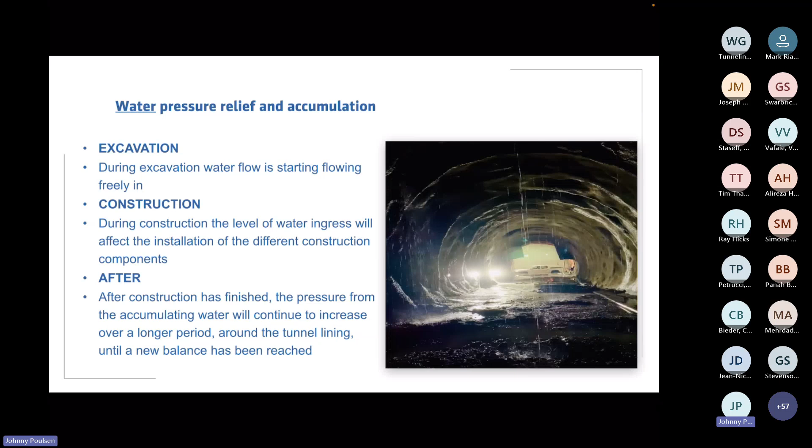The picture to the right is actually from a tunnel in Colombia, a road tunnel we made called Toyo. I think it's the longest road tunnel in America - this is 9 kilometers.

So we have all this water coming in - what is the actual problem with that? Why is it a problem? Well, first of all, the safety during construction is jeopardized, so it can have fatal consequences. And during construction, you sometimes have to do a lot of repair work, like injection work or other remedial work, to be able to go forward with the lining design.

The water pressure also can compromise the structural integrity, not just in the beginning but over time. If we have a lot more water pressure than we thought, then we have a higher risk because of the membrane situation and the thickness of the concrete and the fibers or whatever design we chose - it could fail at some point, referring to the dynamics I mentioned earlier, because you have changing dynamics in the surroundings. We're talking about many years and different types of risks.

And then, of course, the actual water coming in does different types of damage. That could be on the installations, and it can be on the road where it can form as ice, or be slippery on rail tracks, electricity - there's a lot of factors there which are dangerous. Again, with the ice, you can have cracking and spalling of the concrete, and ice falling onto the surface of the floor in a road or rail tunnel.

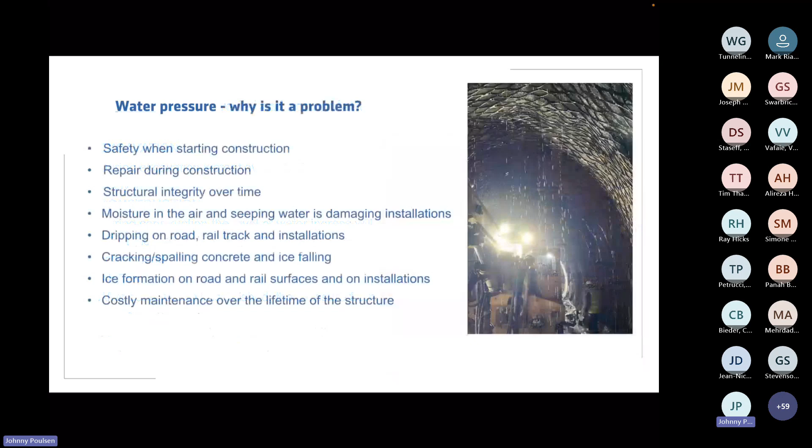So what do we do to handle this water? We have basically three principles we can use. Either we're trying to block the water from coming through and creating pressure behind, and this is done with different components. You have grouting, waterproofing, making waterproof concrete with wire mesh, fibers, or crystalline waterproofing—different types of designs for blocking the water.

Then we have the second principle, where we have it diverted. This is done with line drains and pipes, and different types of pipes through—like if you have a slope, you just let the water come out through pipes. So you try to divert the water so the pressure is no longer there. You can have initial draining on the rock, or later in the lining, in the outer layers, you can have another drain. You can also drill holes to lead the water to certain places. So different types of diverting the water.

And then the last part is where you have a situation where you just let it drip and accept not-so-watertight and dry structures. This can be done in different ways. You can have, for example, plates mounted onto the wall so you don't see it. For example, in a railway station, you may mount plates in front of the wall so you don't see the dripping, but just let it run and then pump the water out.

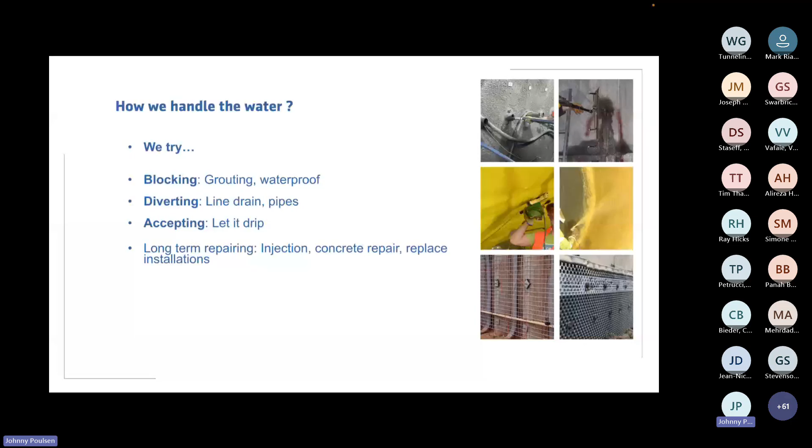So some of the components we use in the design—now we're trying to adapt the design so it's suitable for the individual structure. The first part is the concrete or shotcrete. We can do one or more things to the design of the shotcrete. You can make it fast setting—depending on whether you have a little bit of water seeping or a lot of water, how do you handle it? You can design for less cracking.

You can also choose a very heavy lining. This is typically done when you have a sheet membrane, with two cast concrete layers and a sheet membrane between them—the double shell lining. And you can have thicker shotcrete layers, combined with different additives into the concrete. This could be crystalline waterproofing, for example, is one of the things you can do.

And then, of course, if you have soil that's not so sturdy, going towards soft soils, you have steel girders you could put in, anchors, the anchoring of wire mesh. You can have the umbrella system put in—different structural stabilizers you can use. And then you have the drainage situation, where you can put different types of drainage in: line drains, dimple sheets, geotextiles, to take some of the pressure off the structure or lead water away from the lining.

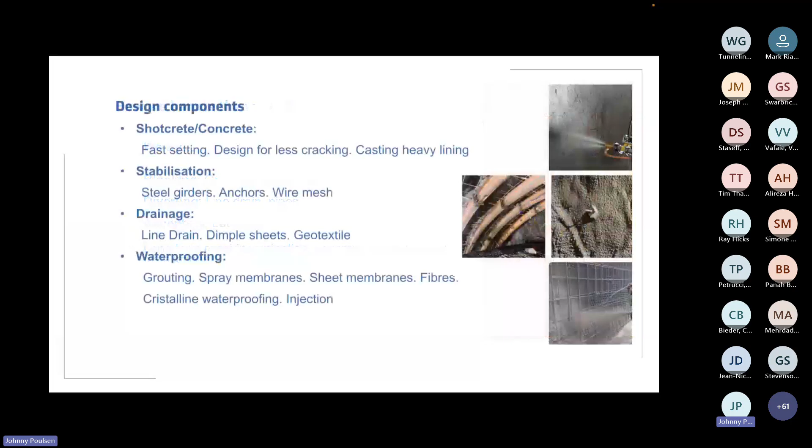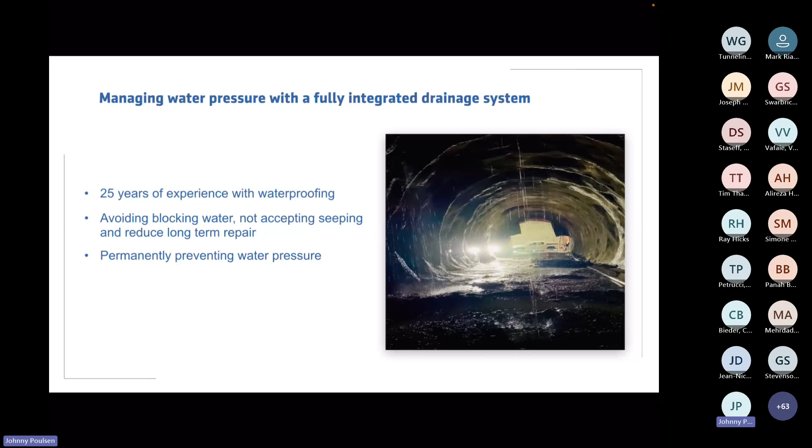With our experience, we found that the best way to improve these lining structures was to somehow find a way to prevent that pressure on the structure. We saw in the market different types of products that do this, but we found out how to design a systematic approach to this. If this is possible, then we can permanently prevent water pressure on the structure and alleviate a lot of these problems and costs.

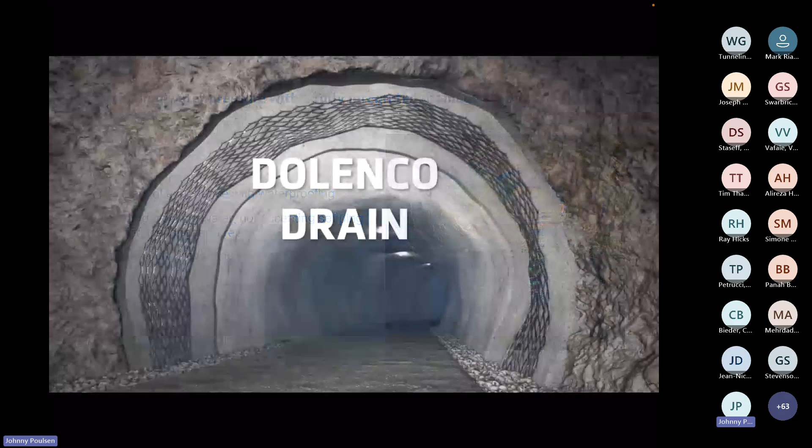That brings us to the Dolenco drain, shown schematically here. I'm going to show you a video in a minute—I'll just tell you what it's about. It shows the principle of Dolenco drain mesh drainage: you have the bedrock, the initial shotcrete layer, then the Dolenco drain mounted as the first product on the initial shotcrete, and then you cover that with one or two layers of shotcrete, in different combinations with the build-ups of these linings. Well, let's start the video.

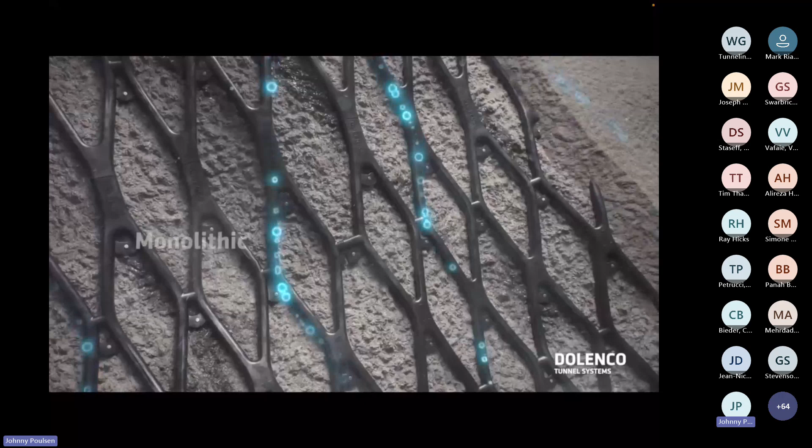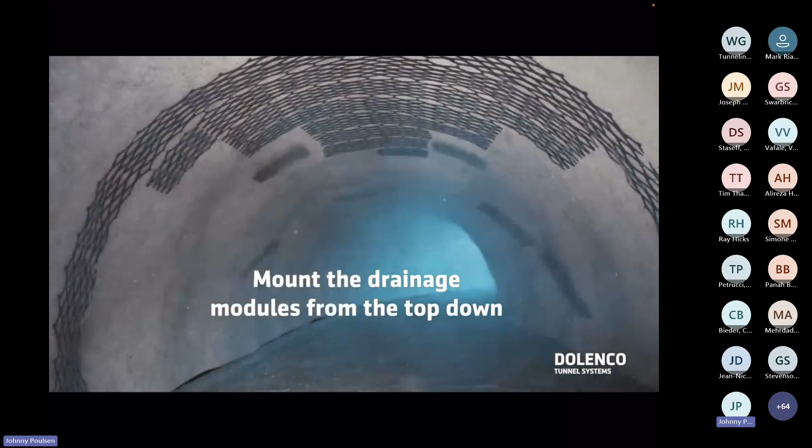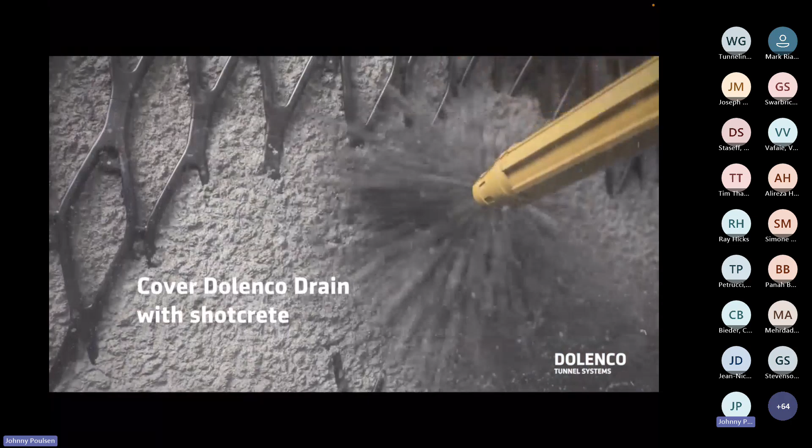As you can see, it's fully embedded into the concrete. The half-pipe modules are mounted from the top down, creating a horizontal and vertical network of channels that will receive the water. And then at the base, there's some kind of detail to alleviate the water away from there.

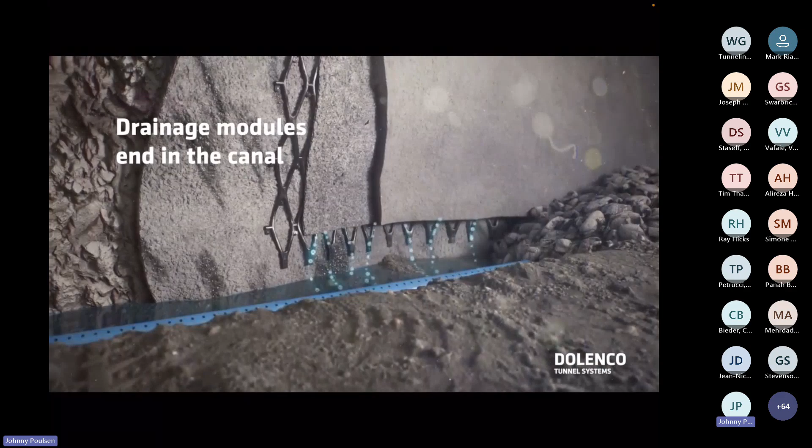So as you saw, it's module based, and it is a very slim part. It's only 14 millimeters, or half an inch, thick. I think you are in metrics in Canada, so I can say millimeters, I guess. For this reason, it's very good for repairing, for example, rail tunnels where there's very little space to work with.

So it's very lightweight, like 660 grams, so it's very easy to work with to mount. You basically have a nail gun with 30 millimeter nails, and you nail that to the surface.

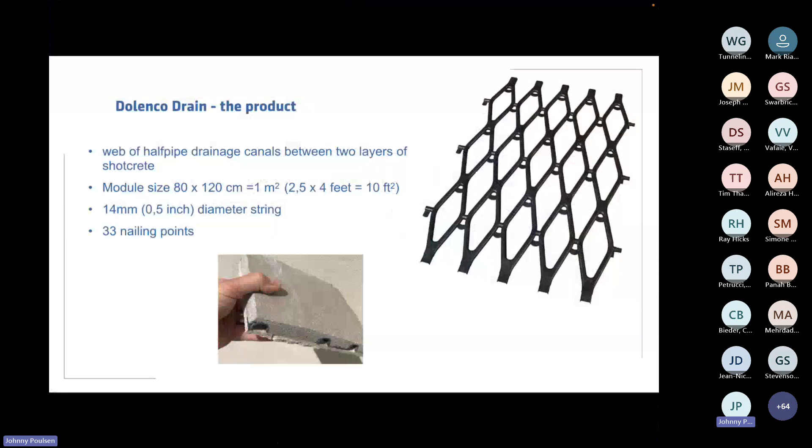When you've done that, you have these half pipes inside the structure everywhere to receive water from wherever it will come out. That's the whole basis of making it in a systematic way like this. So in a few years, if you have water shifting, which it often does, to a new place, putting pressure on, trying to come in, it will be received by the strings and led to the base. In this way, it's a very safe solution for the future.

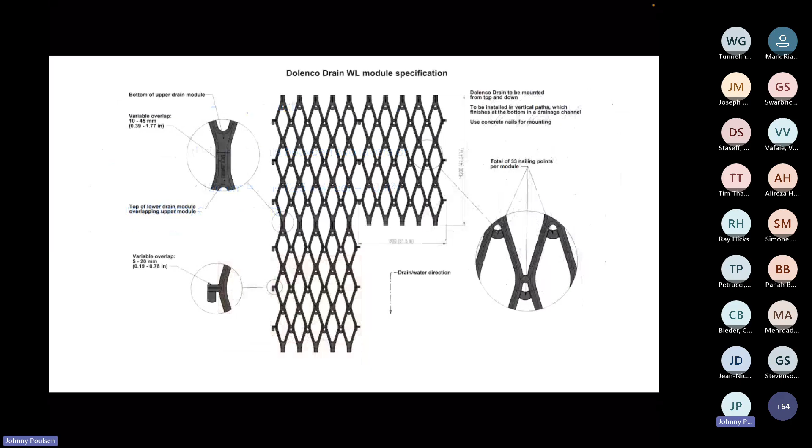Here's a more schematic picture of how the modules are mounted. Top left, you see the vertical connections overlapping and very flexible. Below that, you see the horizontal connection between the modules, so the water can also disperse sideways to the next module. This is important to make sure that you manage the water and there's no pressure buildup in there.

So it can take 8 cubic meters of water per linear meter of wall per hour. This is quite a significant amount of water. If you have that much water, you really can't get the shotcrete to stick to the surface. So this is more than adequate to manage the seeping that will come in, and since it's embedded into the concrete, it's a permanent solution.

As I mentioned before, it requires very little space since it's only 14 millimeters thick, so you can overlay with like 50 to 100 millimeters of shotcrete, and then you're good.

The material itself from the product has been chosen to be a product which can be recycled, so you can take it out and actually granulate it and make new products from it 100%. So this is our first step. We also have a second step, which we're just implementing now, and that's a biodegradable version which is compostable. So if you throw it in nature, it will just be eaten by the plants.

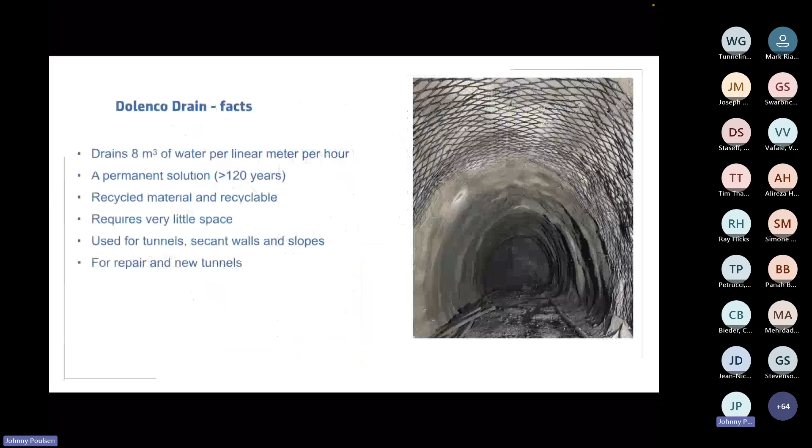Besides tunneling, it can also be used on secant piles, which is another segment for underground structures, like cut and cover, stations, shafts, and other parts of the projects.

Now, the main advantage, as I mentioned from the beginning, is the permanent prevention of water pressure. That is the primary function. This also gives you some advantages if, for example, you are combining with a spray membrane. It makes it possible to stop the water from going to the membranes when you apply the membrane, so it will have time to harden during construction.

Often we see that moisture accumulates behind the spray membrane. If you have the Dolenco drain behind it, it will take the water first, so you don't have to do repair works on the membrane afterward. So you can eliminate or minimize the injection work.

Of course, when you look at the picture here, you'll see there is a lot of space between the strings, and because of that, you have adhesion between the primary and secondary shotcrete layer. For that reason, the primary and secondary concrete layers will both be permanent concrete. So the permanent lining you have can actually be calculated to be reduced, so you can save concrete by using Dolenco drain inside the concrete, because it's a monolithic structure.

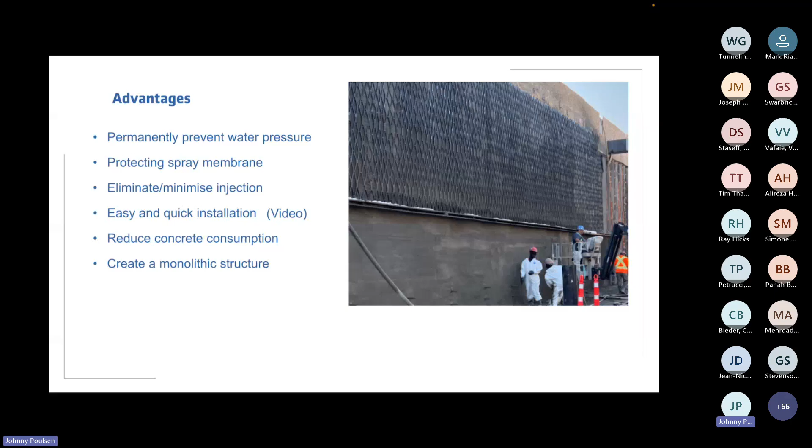Let me show you just a little bit on how it's mounted, just to show you the easiness of it.

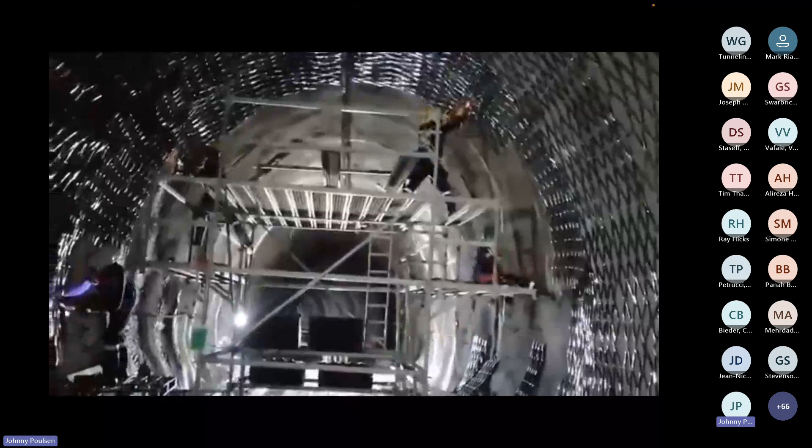This is from a road tunnel in Canada, in British Columbia. In this case, it's from a scaffold. It can also be from a scissor lift.

So we looked a little bit at quantifying the savings, and we see consistently three factors. We looked at the direct cost, the time saving, and the CO2 reduction as a consequence of this. We looked at both hard rock and soft rock structures, and we could see there's quite a good savings in all three parameters.

The one that surprised us the most was actually the time. We saw recently in the project I mentioned just before, there was a time saving of about 60%. Cost savings was like 40%. So there's a huge saving in these structures, and of course, time is one very essential point.

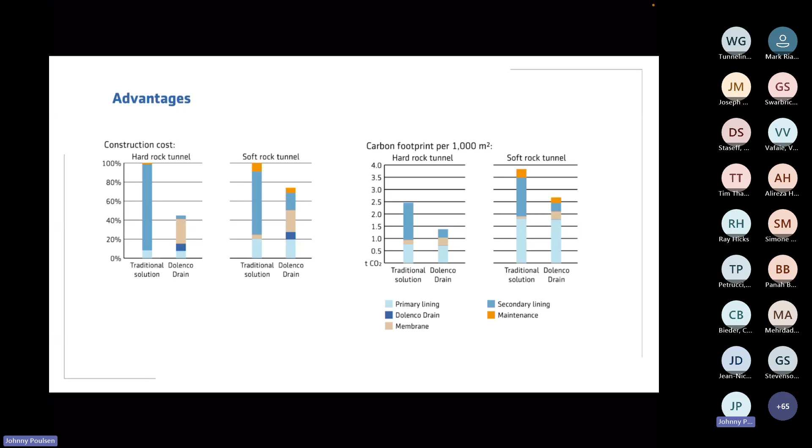So where to use? We have talked about the rock surfaces, and then I mentioned the secant piles, and I'd like to show you a video of the secant pile application here.

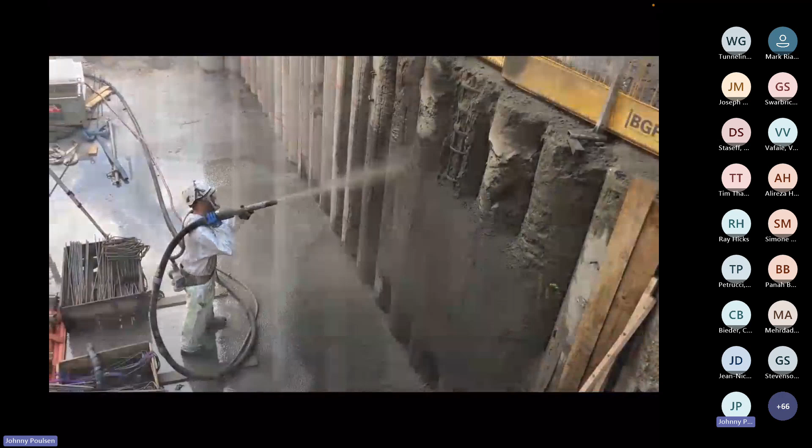As you see here, first we level out between the piles so it's fairly even. It doesn't have to be entirely smooth, but just fairly even.

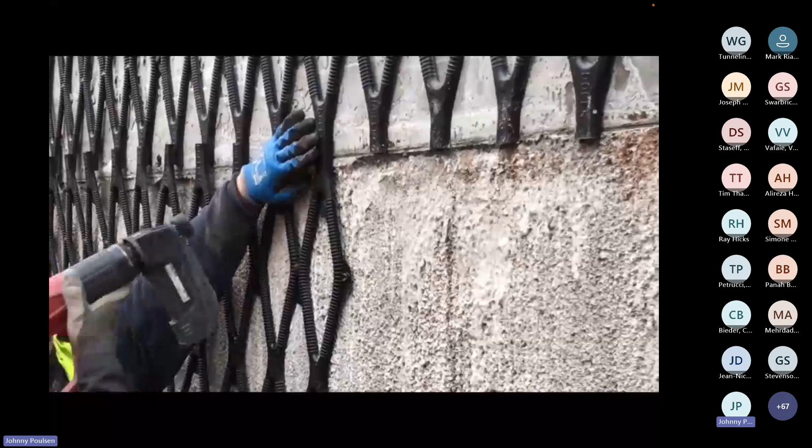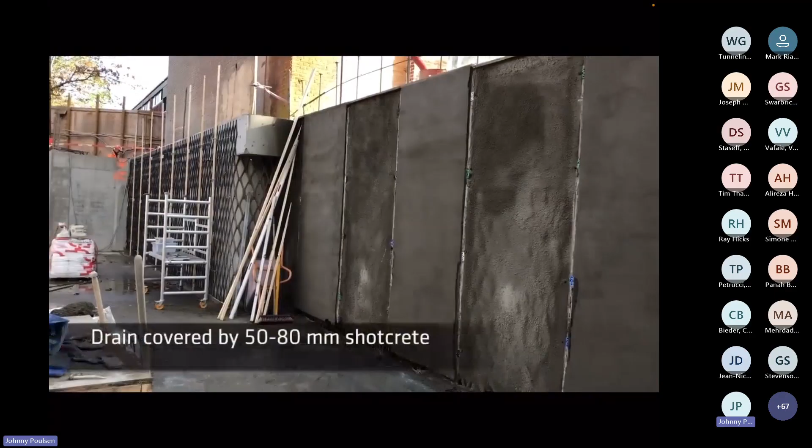Two persons can mount between 12 and 20 square meters per hour. And at the base you cover the ends with geotextile so you don't block them with the second layer of shotcrete.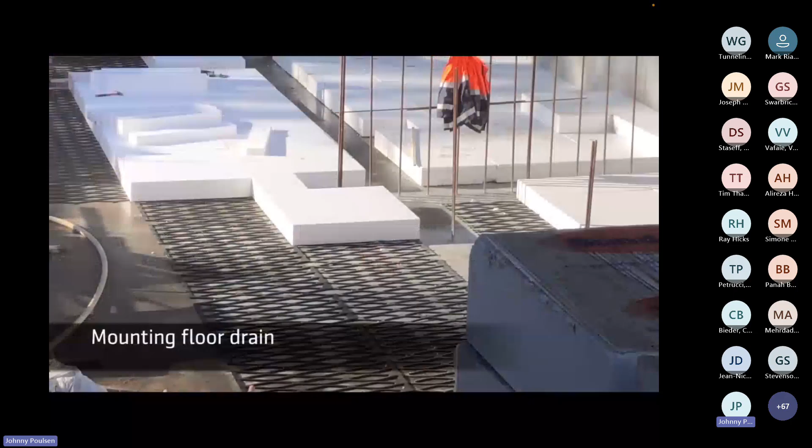In this case, it's also combined with the horizontal version, which can be used in inverts or basements. Then the water is just let into that and then over to a pump sump, or maybe a pipe on the side. That depends on the project.

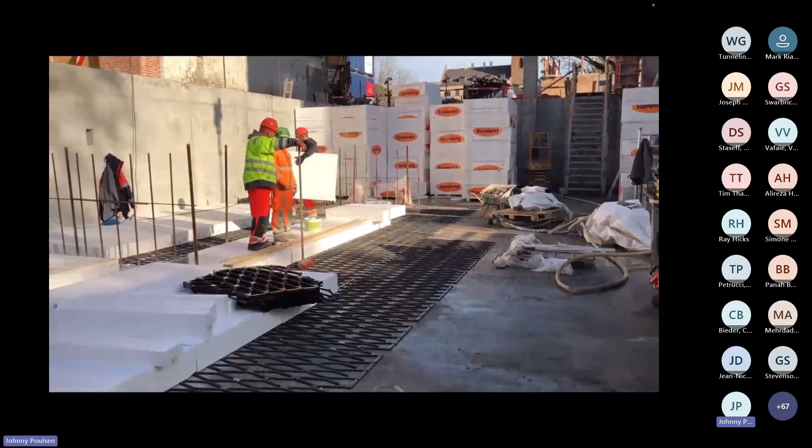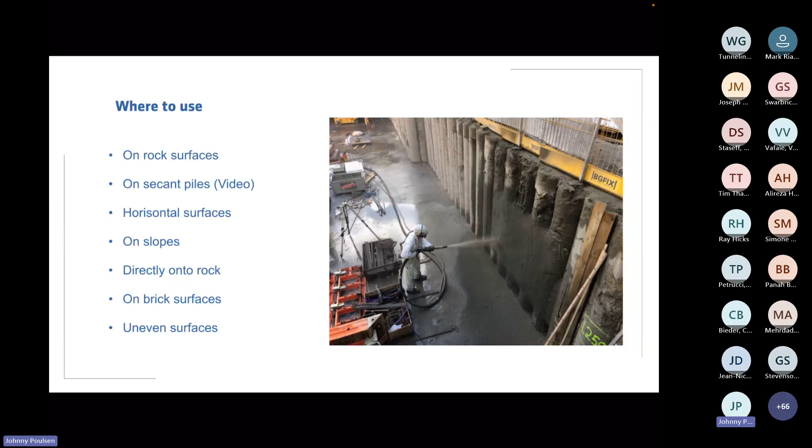Besides these two, it can also be mounted on slopes, and in some cases directly onto rock, on brick surfaces, and on very uneven surfaces. A little bit on that now.

Here you see the schematics of the video we just saw, where you see the very thin overlay over the secant piles, and then Dolenco drain directly onto that, and then cover with shotcrete. In this project, it was actually mixed with the crystalline waterproofing into the second shotcrete layer.

And at the base, we have a gutter which catches the water. This is 65 millimeters wide. It's used for slim structures where this is needed. There will be a little bit later, I'll show you some other detailed options here for that.

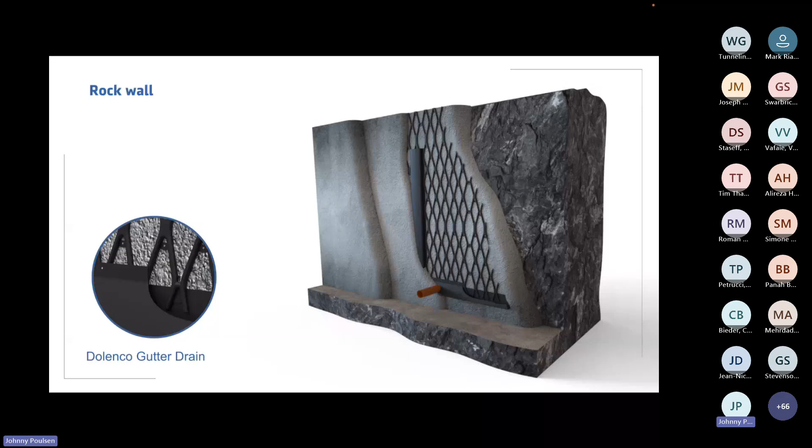Here you see the rock wall, which is the same type of principle. You have the initial shotcrete layer on the rock, then you have the Dolenco drain, and then the gutter at the bottom. And if you have a lot of water coming in at a point, you can use the vertical line drain to capture that water if it's a very high volume of water.

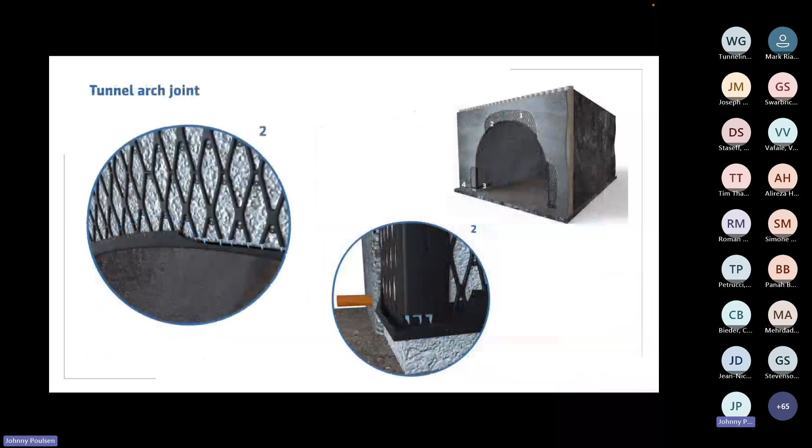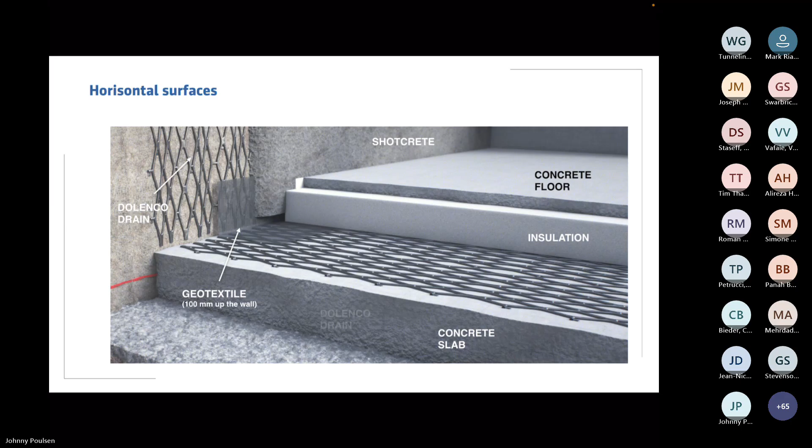Here we see the connection between the wall and the floor for when you use a Dolenco drain in a horizontal surface. As I mentioned, it's typically a pump sump in the floor, one or more strategically placed, depending on the size of the area.

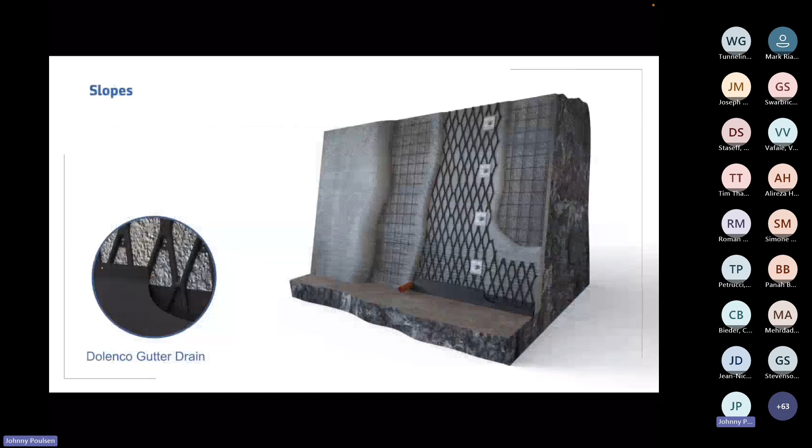Then you have the slopes, where typically you have the initial shotcrete layer on the slope, and then a reinforced first layer of shotcrete with anchoring, then Dolenco drain, and then another anchored wire mesh shotcrete over that. The thickness of that is very variable and often quite high, like it could be a meter or more, depending on the structural needs in the project.

Dolenco drain can actually be used directly onto rock. This is an example from Canada where they had a problem with water coming in and they could not get the shotcrete to stick to the wall. So they basically said, we're going to try and use Dolenco drain on this very uneven surface, and it actually worked. So they just took a wire mesh, pushed it over the Dolenco drain, and anchored that to the wall, then shotcreted the whole thing. It made it possible to get the shotcrete to stick to the wall.

It didn't stop all the water from coming out, but about 80%. Then after that, they cast concrete onto that, which stopped the remaining water seeping. And it makes sense, because when you have a situation like that and you cast that concrete afterwards, the water will not try to get through all that concrete.

It will find a way back into the incomplete network of strings left there behind, because it's not going to be a complete network of strings, since many of them are at a distance from the rock. So when you shotcrete, you'll close a lot of the strings, but it still had the effect you needed, so it could lead the water to the base.

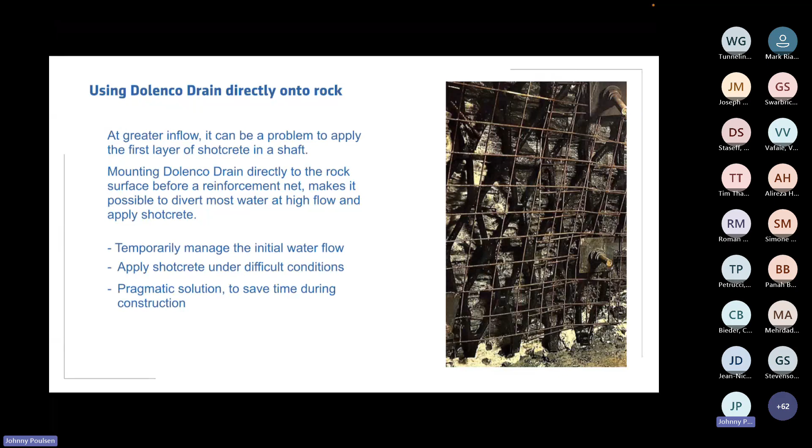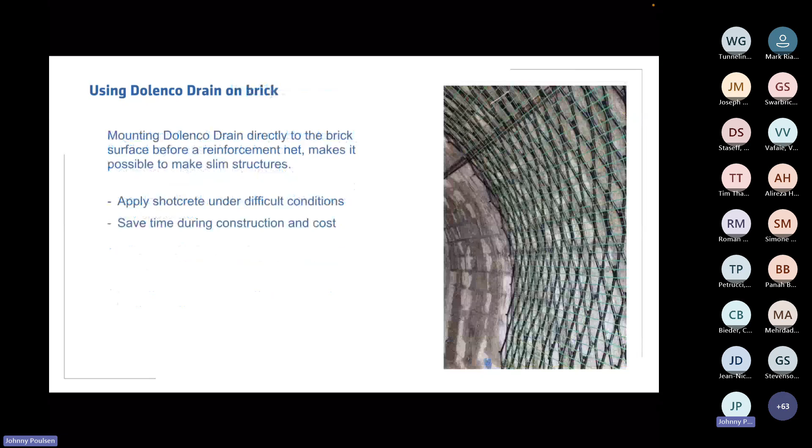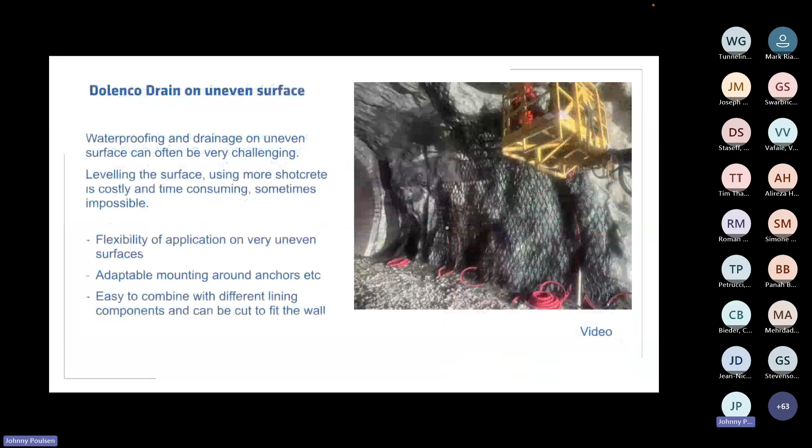This picture here is to show you the variability of the mesh. It can actually be put on very, very uneven surfaces. Let me show you just an illustration of this application here.

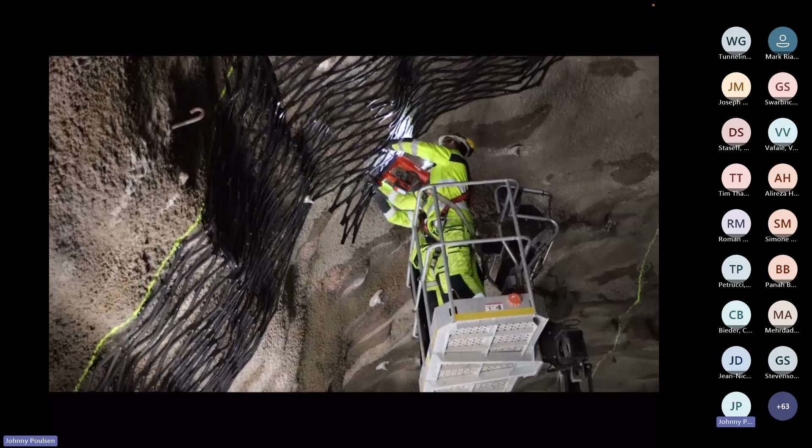So you can see the contours of the tunnel wall there, the seeping, the anchors. And here is from a scissor lift — you can see the tools you need. You don't need big equipment, just a nail gun with a battery. That's it. So it's easy to get in, start the work, and get out.

So if you have a tunnel repair where you only have a little time during the night, then this is an ideal method. The modules are very lightweight — you can see it's very easy to manage there.

Sometimes we have more water coming in. We have three options on how to address them. The first one is just a crack, and if you have a crack seeping, then usually we don't do anything to that — we just let the shotcrete over it and let the water find the nearest string and alleviate the water pressure into that string. The second point is, if you have enough seeping for a 10 millimeter rubber hose, you basically drill that into the structure.

And lead the rubber hose into one of the Dolenco drain strings. In this way, the water will be running inside the strings, and you can shotcrete over this without problems. The third one, which I mentioned in the beginning also, is that you have a point where there's a significant volume of water coming in, and you use the line drain to contain the water inside there and just put the Dolenco drain around that.

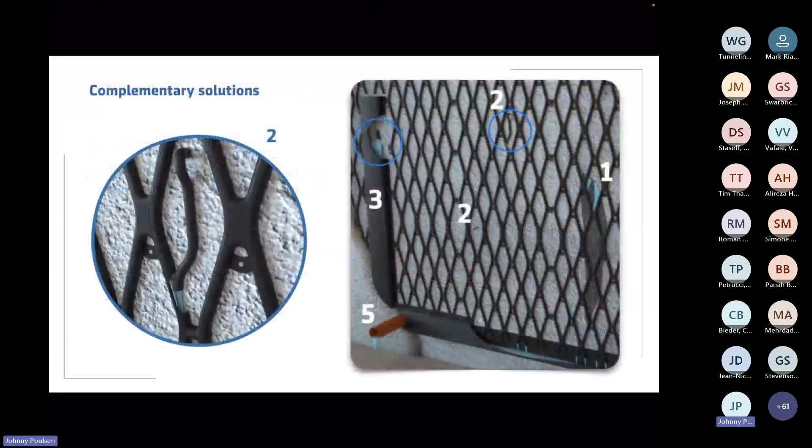When you have this in the package as well, when you're designing, then you can be very, very sure that you'll have all bases covered to get a good result.

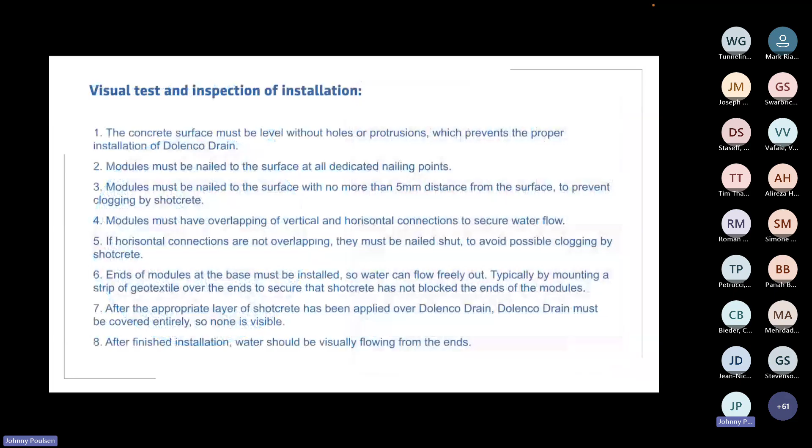So basically it's visual testing, and measuring how much water is seen in the pump sump is another way of doing it.

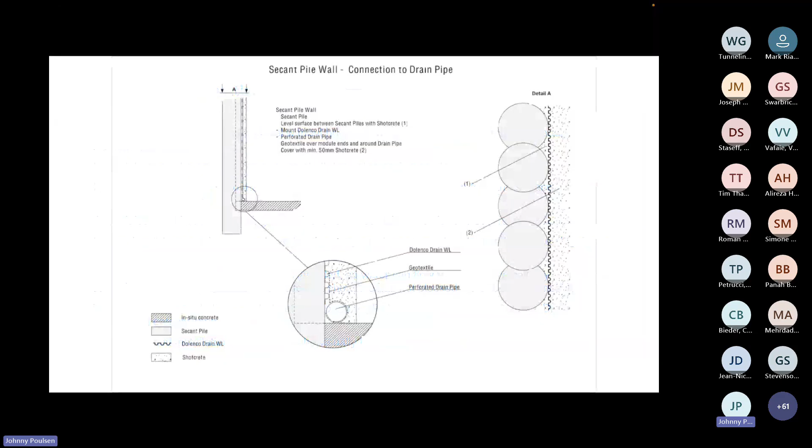In this case, it's shown with just one layer of shotcrete, and that's sufficient. Here's an example with a similar situation, but combined with a sheet or spray membrane.

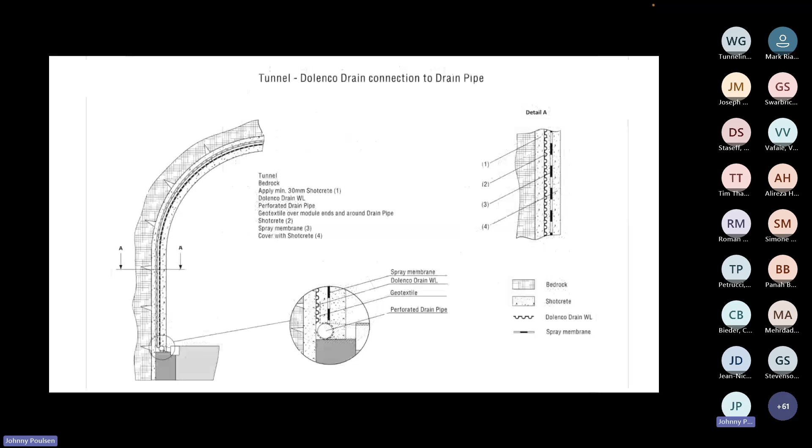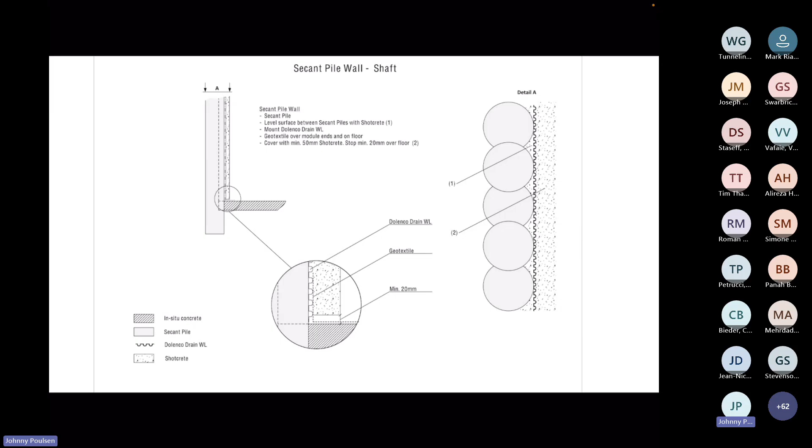I only want to talk about detail E here, which is an example where the Dolenco drain is mounted past the slab and into a stone drain layer beneath the slab. This is also an option. So that's detail E.

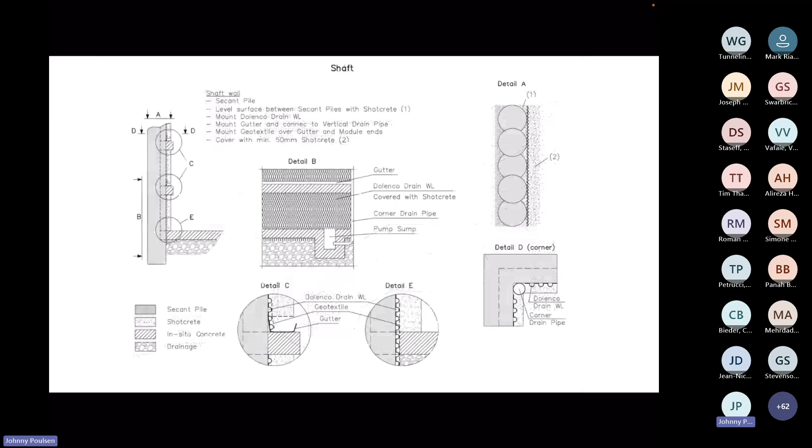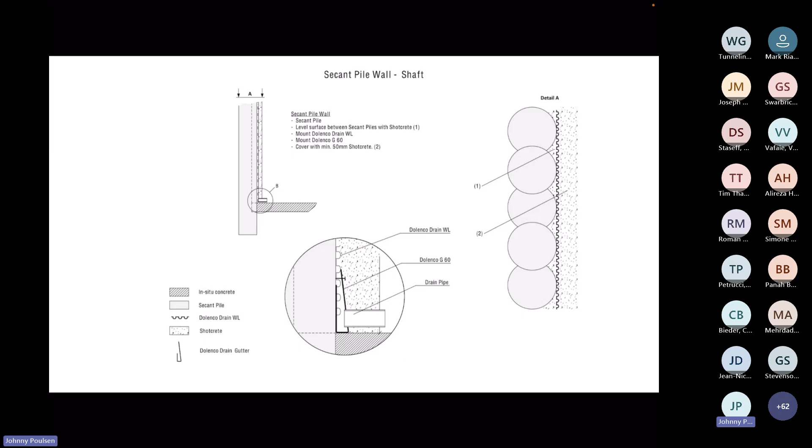So finally, some examples of application on different types of projects. The first one is a road tunnel from Switzerland, where the tunnel actually collapsed and they rebuilt it. Because of the very small space to rebuild, they took a Dolenco drain, mounted it on the surface, and covered it with shotcrete, which made sure no water came in.

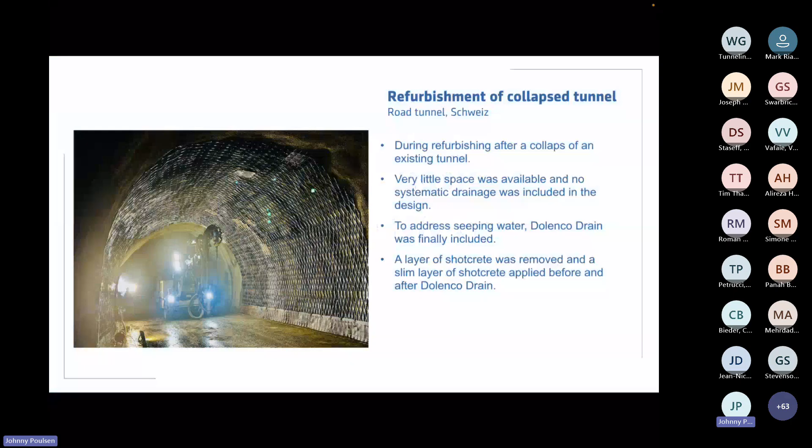The second one is from Canada, Montreal, the REM. We did different parts of this project, but I'm just going to show one part: the tunnel, where it was actually two rail tunnels, and the wall between them was taken down. Then they expanded the tunnel, put in steel girders, umbrella, and shotcrete layers combined with the spray membrane and shotcrete layers.

Before the shotcrete, there was also a smoothing layer. During construction, they found that water came to the membrane, so it was not possible for it to harden and get full function. During construction, they changed the design to include the Dolenco drain behind the spray membrane, which made the work easy and allowed it to go forward without having to do repair work.

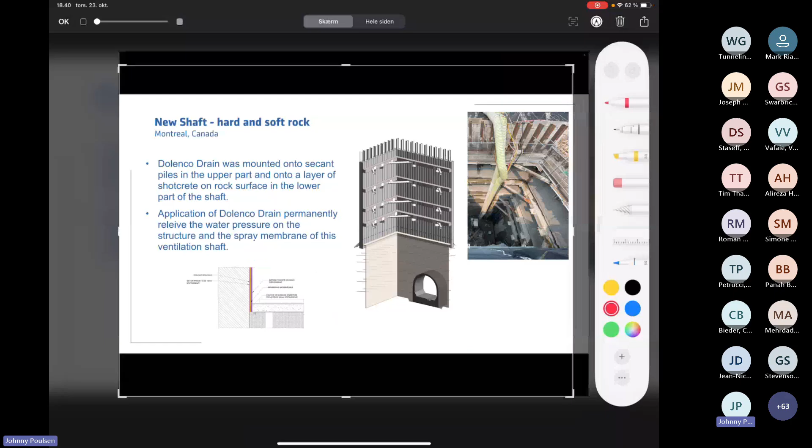What I would like to illustrate here is that in this case, the Dolenco drain was mounted like in one of the examples I showed you before, where the Dolenco drain is passed through the slab and into the stone layer beneath the slab. You can see that the 100 millimeter end of the Dolenco drain goes in beneath there. And of course, you would have to put a strip of geotextile over the Dolenco drain modules before you cast the concrete, so the cement paste will not seep into the strings and close them.

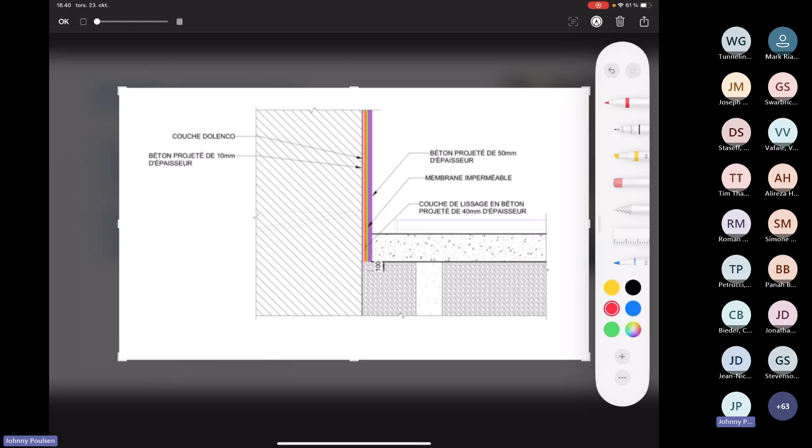The reason there's so much water coming through is because there's a river just on top of this - it's actually under a river. So there's a lot of water coming in because of that.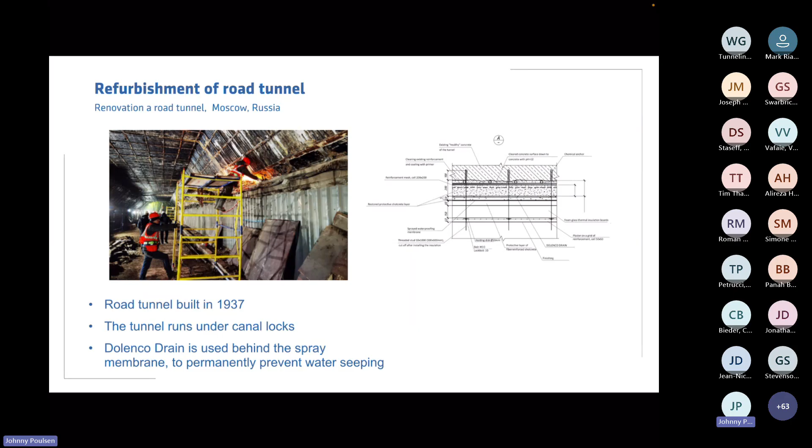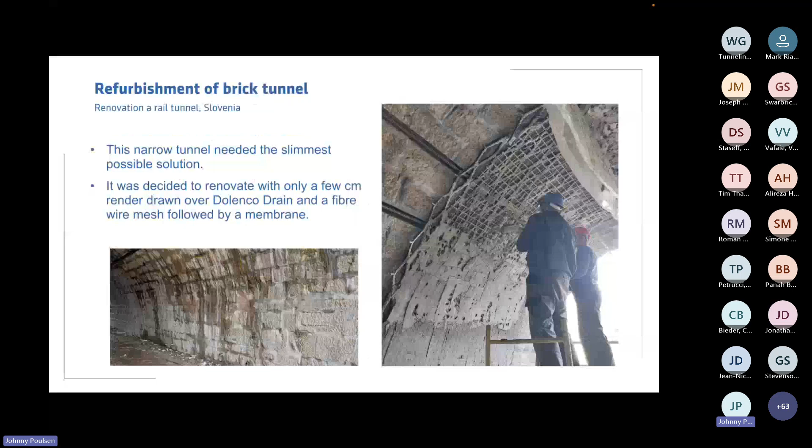Here we have an example of the brick tunnel, where you see the seeping on the picture there to the left. There was a lot of work done on the joints first, then basically mounting Dolenco drain and the wire mesh at the same time onto the surface, and troweling on the mortar, in this case also combining it with spray membrane, and then another layer of shotcrete render. Sorry, that was a mortar render put on here.

Here's a little bit closer to home for you. This is in Philadelphia, where there were retaining walls that were leaking, and the only possibility they could see was to remove 10 centimeters of concrete, then mount the Dolenco drain, and then cover again with 10 centimeters of concrete. That solved the problem, and it's a very sturdy and good solid solution to do like this.

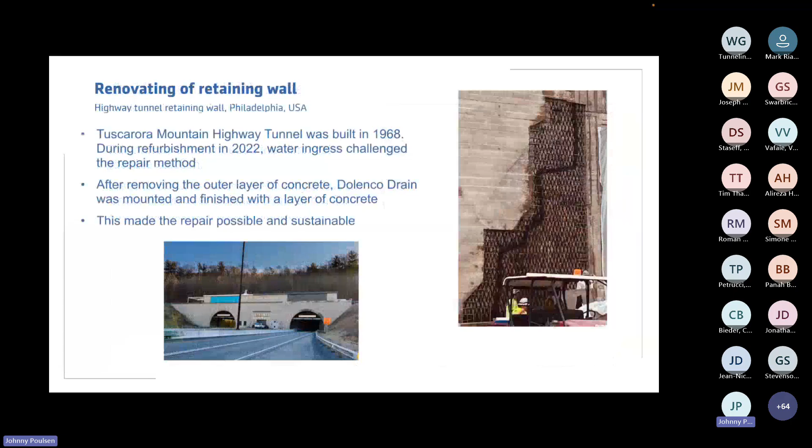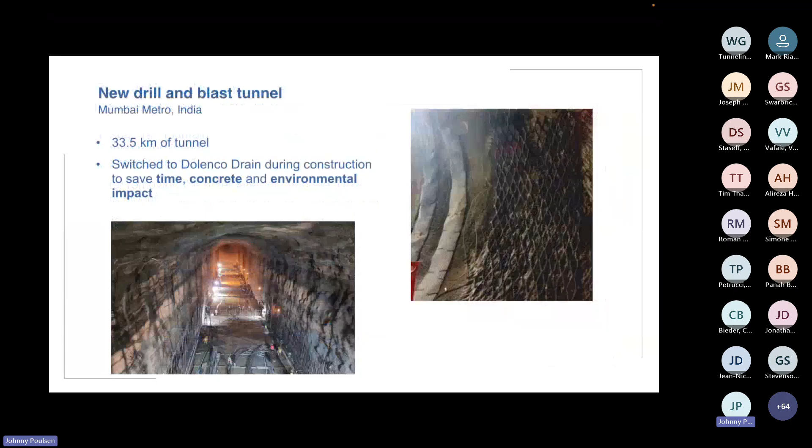Finally, this is from Mumbai, a project where they had a double shell lining in the design, and they changed to shotcrete because of time problems, and because they didn't have enough structural strength and not enough concrete with the shotcrete to take the pressure. In some parts they used Dolenco drain, and in some parts they used other solutions. You can see here on the picture there's also line drains besides Dolenco drain behind the shotcrete, to be able to put on the spray membrane. I believe this was the first project where they did that combination in India.

The final project is from the REM. Again, that's a station where you have the secant piles, leveled out between the secant piles, put a Dolenco drain on, and then the shotcrete, combined with a spray membrane as well. So sometimes we use it together with spray membranes, sometimes with fibers, sometimes both, sometimes standalone. It very much depends on the project, what we're doing. And here also you had ramps, the wall for the ramps, the cut and cover.

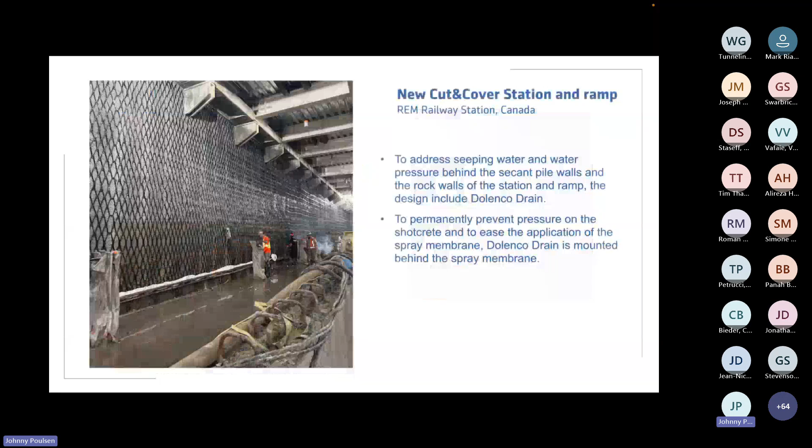Okay, let me get back.

That was a fantastic presentation, Johnny. Thank you very much. I hope you have a little bit of information, and I'm ready for any questions you may have. Absolutely, yeah, that was fantastic. I had no idea that this technology existed, and when you started your presentation I thought maybe it's like a newer item on the market, but it's clear that it's quite worldwide in use.

So I'm going to go to our chat box now. The first question is from Amir Ali: As many clients require using waterproofing membrane systems around the box tunnel or inside the bored tunnel, how do you use this application of both Dolenco drain systems with waterproofing membranes for such structures?

Well, Dolenco drain is used in a variety of combinations, that would be my first answer. If you want to be more specific, when you say membranes, we separate typically between the spray membranes and the sheet membranes, and Dolenco drain can be used in combination with both. Which combination you use, we actually very often have Teams meetings with the engineering offices, and go through the details and try to help optimize the design. We discuss what to do in different situations. Sometimes we get the information about the whole tunnel, and then discuss: okay, in these sections there are different solutions. So it's actually a variable.

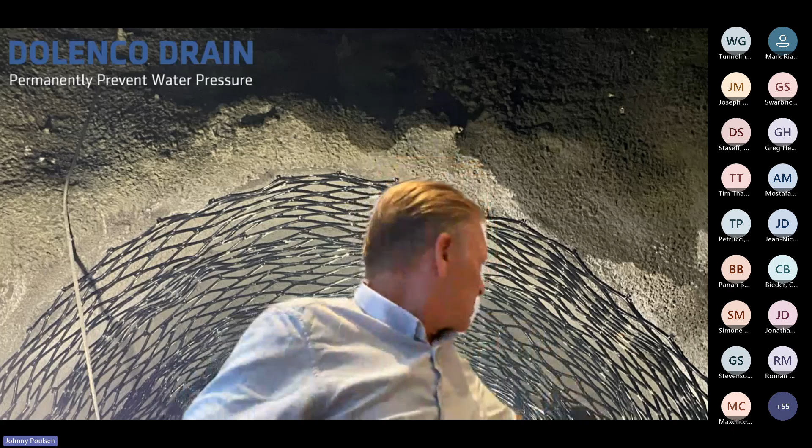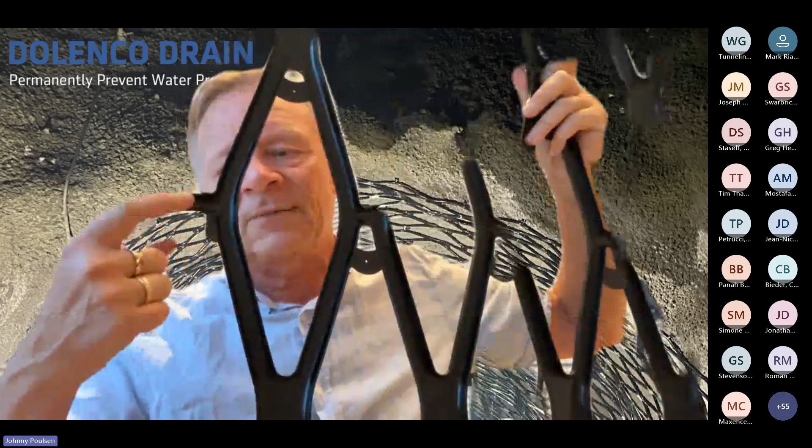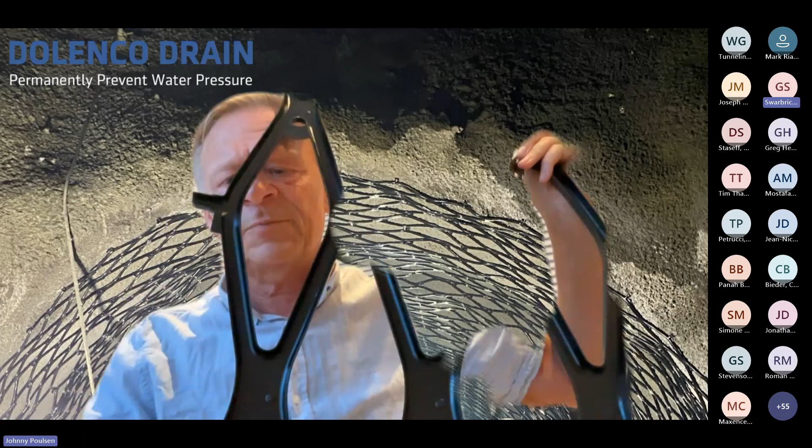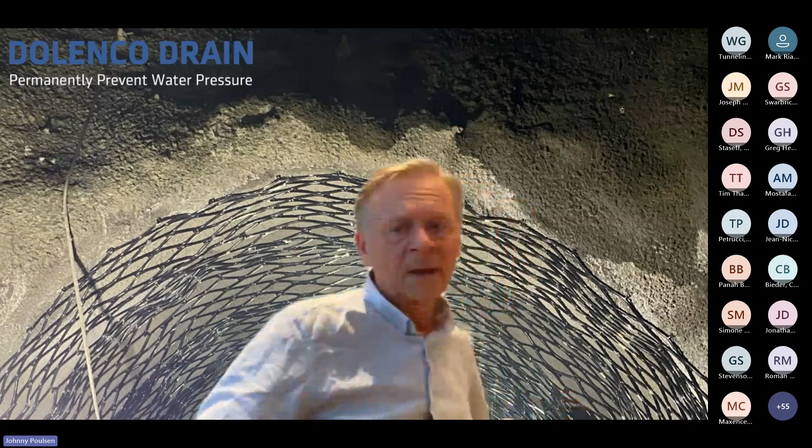So it will actually be flushed out, but you can also talk about having a clean out of the horizontal drainage. The story isn't finished there, because sometimes you'll have so much material coming out, or a piece coming off and blocking one of the strings, maybe even two, three, or four of them.

This is okay because it's in the design to have so many strings that if water accumulates in one, it will just rise a little and then go to the next string and the next one. So we actually permanently prevent pressure buildup—that's the main focus here.

But we do have, in our patent, a last resort. We don't really see it being used, but it's possible, and we often talk to clients about this. We have a system where, with GPR, you can scan up to 15 centimeters into the structure and identify if a string is full of water or empty. By making a horizontal scan, you can quickly identify where the blockage is, then drill in at an angle above that and route it out mechanically or with water pressure, and then close it with a fast-setting waterproof mortar afterward.

Perfect, that's a fantastic answer. Our next question comes from Mei Chung.

What is the design life and warranty for these drains?